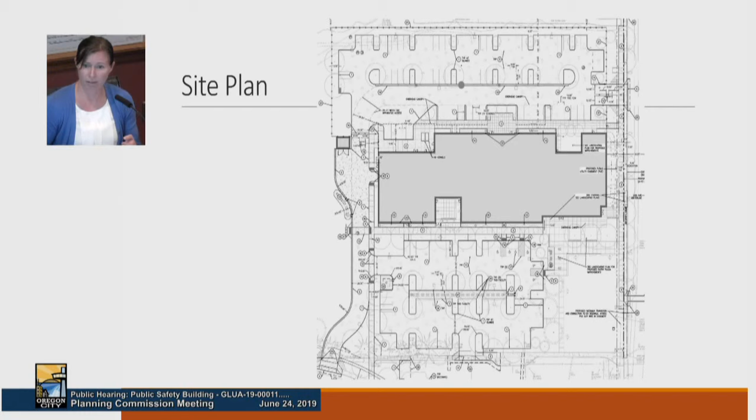So a slightly larger zoomed out view of the site, you can see the surroundings and the existing kind of open space field area that will remain.

Along with that, the applicant is proposing this east-west pathway connection, starting on the Linn Avenue sidewalk, which the proposal is to widen to 8 feet, add a planter strip with street trees, and then this walkway that goes east-west will come along the south edge of the building and then end at the field. There is an unimproved right-of-way here, Marshall Street, that path will eventually connect to.

So we have a condition of approval in the staff report that any future development on this property would require that extension, but for now it will just end at the field. There's also a north-south pathway from Warner Parrott that connects up to that pathway, and of course there are lots of other pedestrian walkways around the site.

This dash line right here, I want to point out, is the expected boundary of the future roundabout at the Linn, Warner Parrott, Warner Milne, Leland Road intersection. So with that roundabout, we expect that this parking lot, the existing parking lot on the south side of the community development building, will be lost.

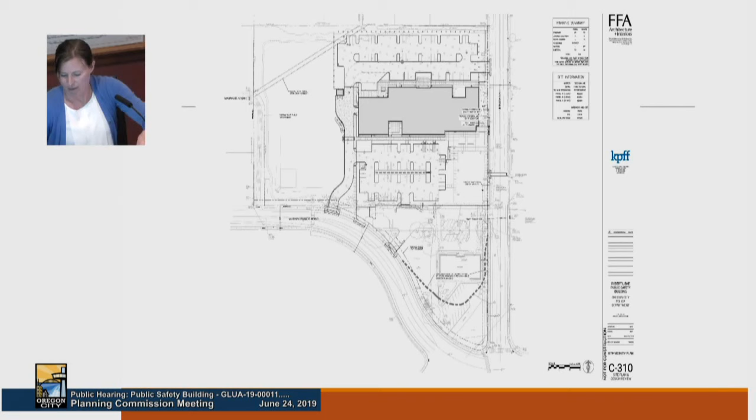Most of the site plan design review criteria would be a type 2 review, a staff level review, so I won't go into a lot of detail. But the variances are, of course, planning commission level decisions.

So the first one is related to building frontage on Linn Avenue. The code requirement is that sites with 100 feet or more of frontage, at least 60% of the site frontage width shall be occupied by buildings placed within 5 feet of the property line. The applicant has gained a greater setback than 5 feet through pedestrian elements in front of the building, so their setback will be about 18 feet, but that 60% of building frontage is not met.

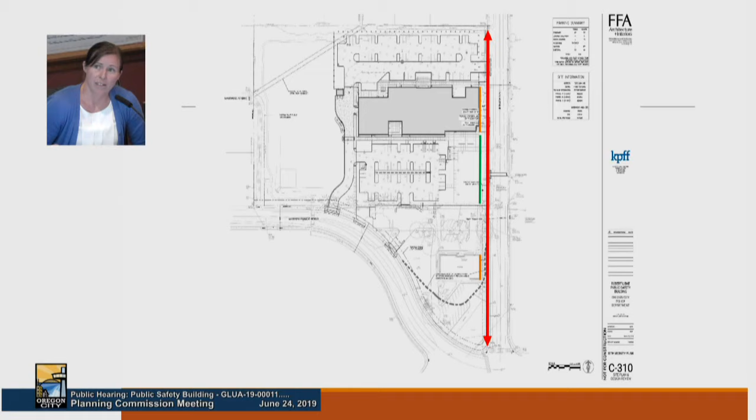The applicant's explanation is that the east-west orientation of the building allows for more daylighting and less energy use, that there are security reasons for that, and that it provides a separation between the public and private areas of the site. This is the Linn Avenue frontage, and the building frontage here is the proposed new building, about 100 feet of frontage, plus the existing community development building. Adding those two together does not reach that 60% requirement.

We do take into account the plaza area, which adds significant frontage of public open space. That doesn't meet the letter of the code, but we're considering it within the overall scheme. Also, the existing parking lot area between the community development building and the new proposed development leaves room for potential future buildings, city facilities. While there's no plan for that, we know it's a future possibility, and if that were to occur, this site would come closer to meeting that standard by adding more building frontage along the street.

The criteria for variances, to summarize, is that it won't impact neighboring properties, that it's the minimum variance required, that granting the variance would equal or exceed the purpose of the standard, that any impacts are mitigated, that there are no practical alternatives to the variance, and that it meets our comprehensive plan.

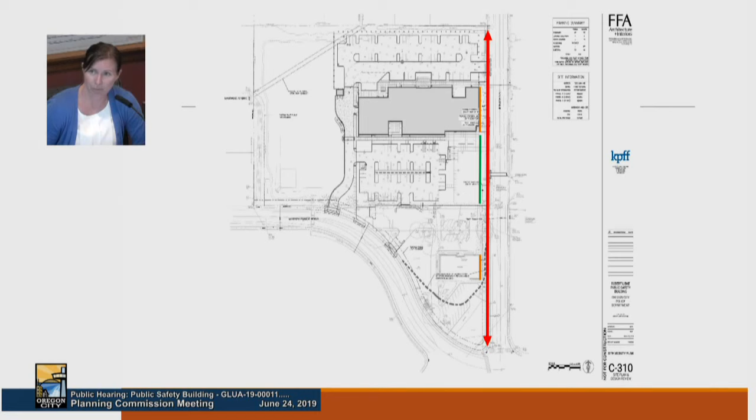So the second variance— Quick question, did you infer earlier, before you started, that all these variances wouldn't be an issue once the code gets changed in maybe the next month?

No, that's the code interpretation. Some of this code is proposed to change in the code amendments, but I don't think it would change in a way that would make their proposal not require a variance.

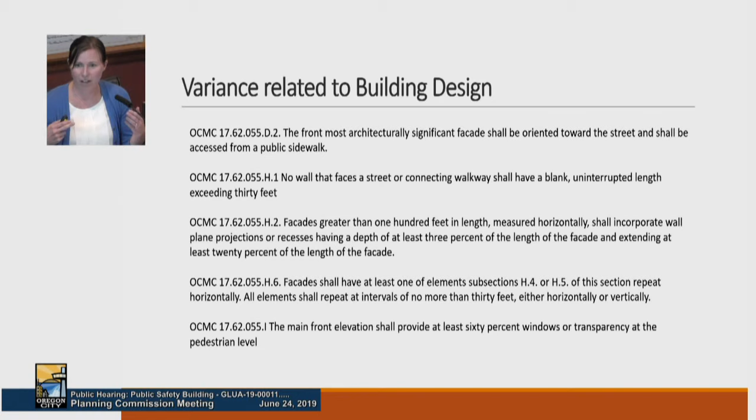So the variance related to building design: there are 5 design standards that the applicant is requesting a variance to. The first is that the most architecturally significant facade be oriented toward the street, but in this case it's actually facing south, not facing Linn Avenue. The rest are related to building articulation, wall articulation, detail of building materials, changes in colors and textures, and avoiding the use of long blank walls.

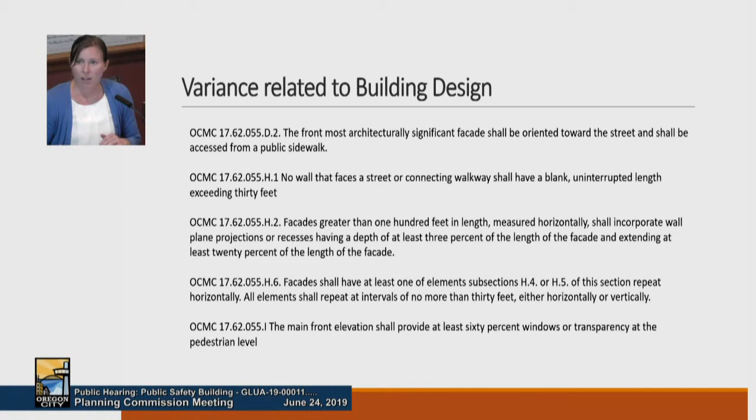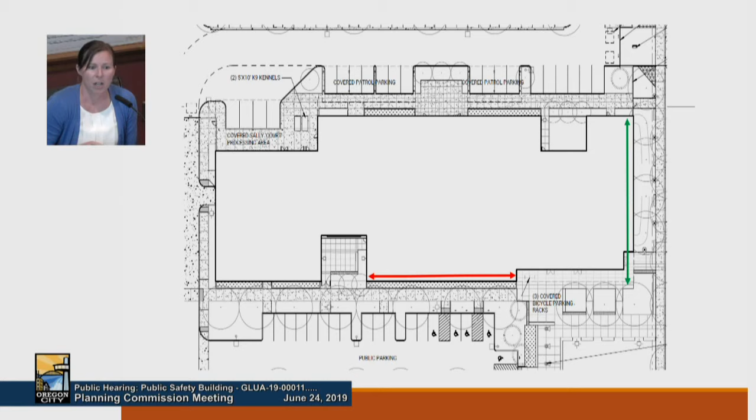The applicant's rationale for these variances is that a lot of them are based on design decisions. This is a modern building with a modern aesthetic. The entrance faces the plaza rather than the street to provide guidance to visitors and draw them into the entry.

There are security reasons for some of the transparency differences and blank walls. And then, of course, the building layout has bathrooms and other rooms that aren't appropriate for windows on that front facade. Adding windows to bathrooms is not something the applicant wanted to do in order to meet transparency requirements.

So we do have some recommended conditions of approval based on these variance requests. One is to increase as much as possible the transparency on the front facade.

So if we go back to that front facade, we think that this window can be either extended downward to the pedestrian level or moved down to the pedestrian level in order to count all this length as transparency.

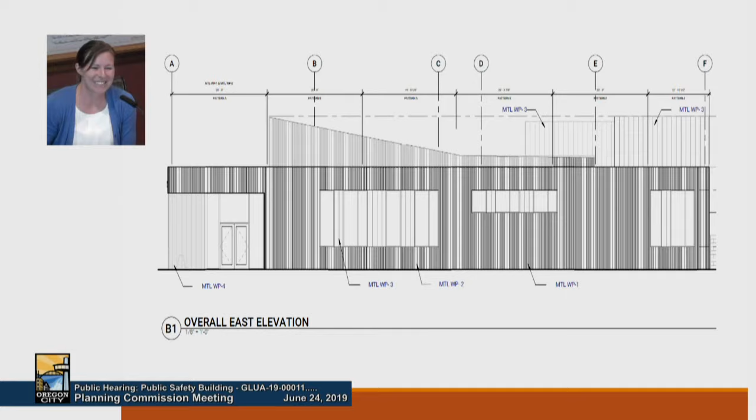Are they all bulletproof windows in that area? I'll let them answer that. But is there - can you see through them? Is it just a mirror? The windows on a building, we do regulate that the glass can't be fully reflective. But if people want to put blinds and drapes on the inside, like this, we don't regulate that. Okay, thank you.

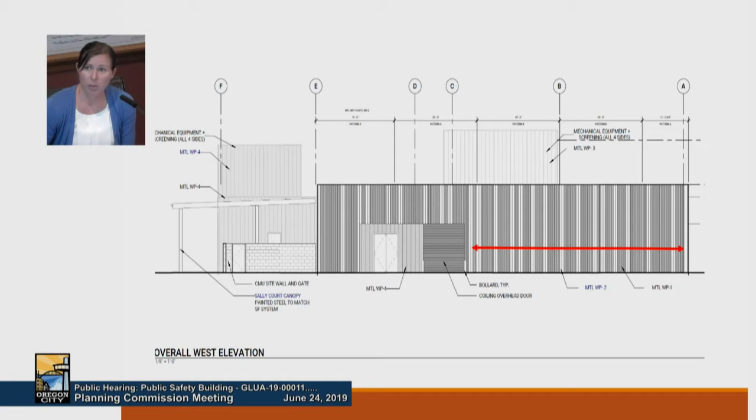Another recommended condition of approval is for some of these blank wall areas - that the applicant add some sort of architectural interest. In discussions with the applicant, we understand that can be in the form of changes to the actual building wall, or elements not attached to the building, such as a planting trellis or something that just adds interest without affecting their building design.

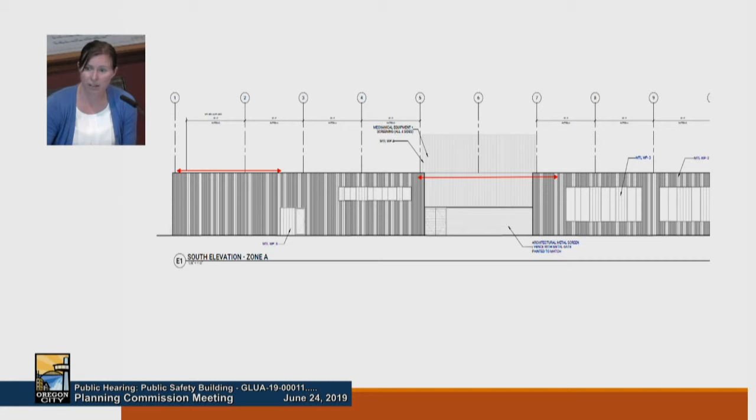Okay, so apologies for this long staff report presentation, but we recommend approval with the conditions in the staff report, and I'm available for any questions.

Any questions for staff? Is there a zone in the code that specifically allows for a police station, or is it completely absent from the code in general? I don't think it's absent, maybe in mixed use. Their code identifies police station with fire stations in all circumstances except for in the zoning designation. As far as it being an outright permitted use, I'm not quite certain, but I believe it's conditional, almost always paired with the fire station, which is where the fire station connection in this code interpretation came from.

Any other questions for staff? Okay, we'll move on then for a 15-minute presentation from the applicant.

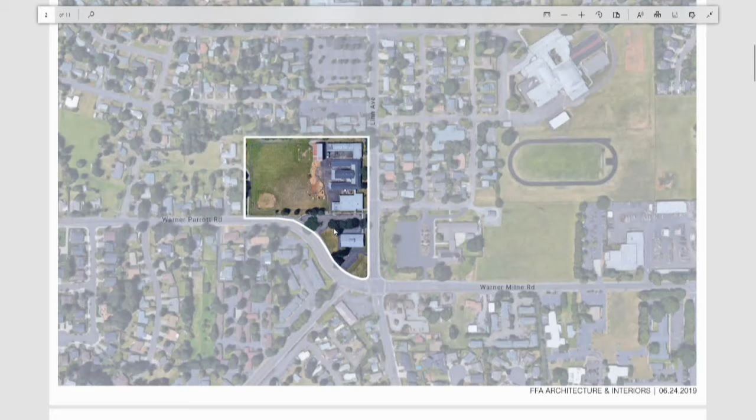And so with all our projects, and specifically this one, since there were so many stakeholders, we met early with all the community groups, police, the court staff, counselors, and neighborhood meetings, and really tried to get a sense of the goals and what this project wanted to be before we even put pen to paper. A couple of things that really stand out were this idea of the civic campus, celebrating history and enhanced public amenities, as well as the warm, welcoming public experience piece and how we start to bring that into the facility.

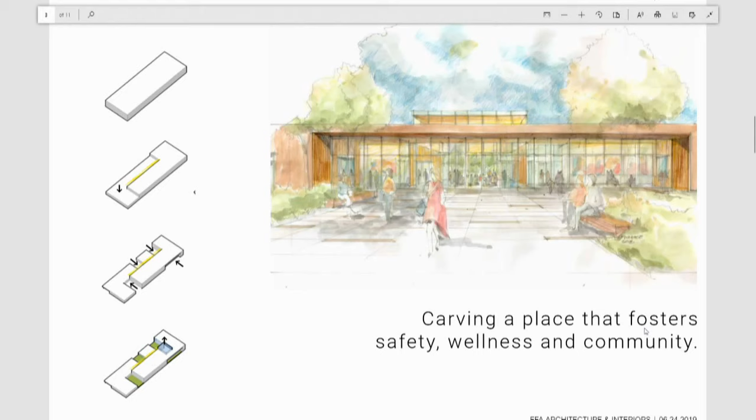Those are initial sketches here, and the idea of carving to foster a place for safety, wellness, and community really started to be that core that drove our design process.

With materials, we really started by looking at Oregon City's history, and that notion of being first founded on these basalt cliffs. As these cliffs are carved away, you start to see a lot of texture in the rock and how those patterns work. So we targeted the exterior of the building to represent that basalt texture and those patterns of striation, and looked for materials to be able to do that.

With that idea of carving in to create public spaces and connections, we wanted that to feel open and transparent. You see images here on the right of spaces we wanted to create, places people wanted to be, and those were the drivers of those spaces.

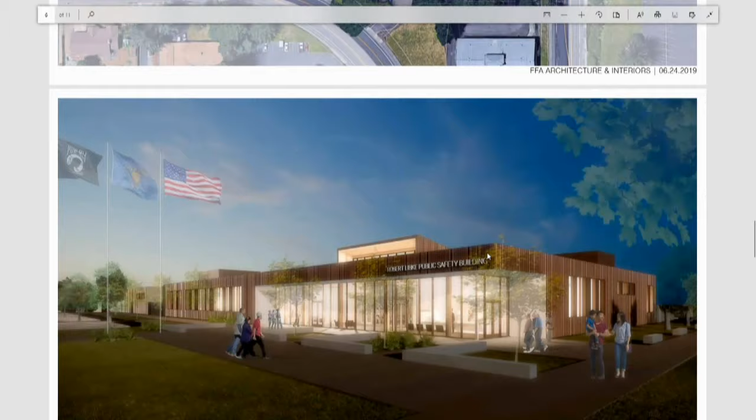This is the view from Lynn, walking or driving along Lynn Avenue. It shows the impact of that main public plaza, as well as the transparency of the building, with the idea of how we can draw people into the site and into this plaza environment. We also popped up the courtroom and multi-purpose room in the center to be a beacon you see as you drive by and see through.

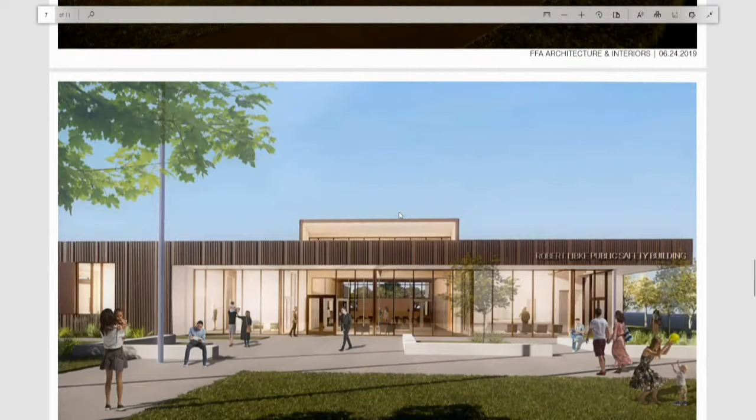As you get in, this is where you're standing in the plaza looking at the building, and you see the transparency Jim talked about - we're really seeing into those main community spaces. This whole area feels warm and welcoming, so we're using cross-laminated timber for the interior, giving these spaces a warm, nice, inviting environment.

You see the texture on the outside hitting back to our material concept of creating this texture and striations, with a more rugged rock-type texture on the exterior that softens as we bring people into the interior.

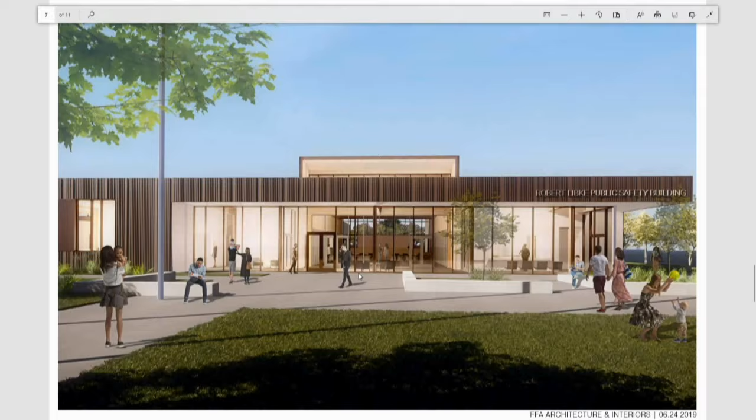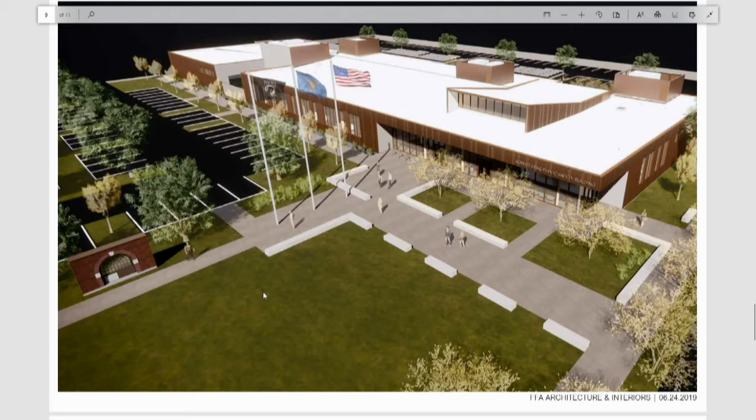Zooming out to see the plaza, that main entry plaza space - the history component became important, both a memorial to Robert Libke and the history of the old school there, finding ways to bring that history into the plaza. So we have a view showing a proposed historical marker, a commemorative marker to the old school structure, that would be part of that community space out front that everyone would see.

And taking that, we want to take the window, if you recognize that from above the doorway, and literally put that into here. It seemed people needed a relic, not an artistic interpretation, but a piece of that school there that I can always see. That's the most memorable aspect visually, I think, from Lynn Avenue of that school.

Yeah, and I think that hits on our site plan concept, because a lot of times in a police facility, you park the car and immediately walk to the lobby. We really, from a site perspective, wanted people to park the car and transition through this lobby or plaza area, connecting to the history of their community before they went into the facility.

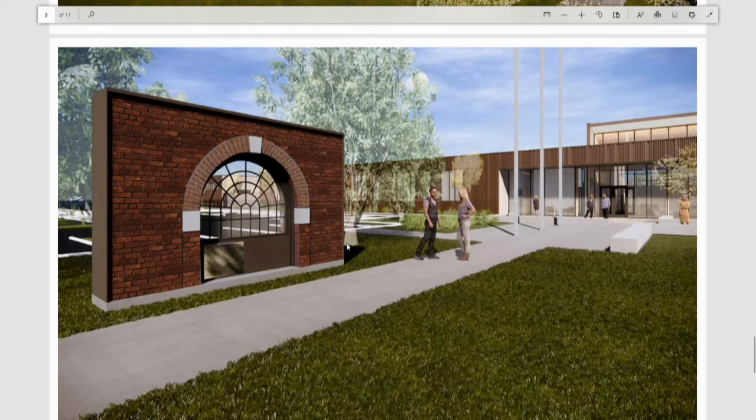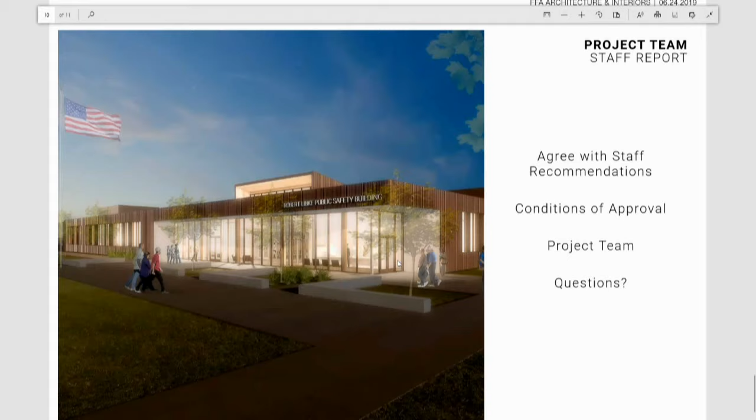So overall, I'd really like to thank Kelly and staff. It's been a really good process to be a part of. Big picture, we agree with all of staff's recommendations and the conditions of approval they're recommending. We brought our project team, our civil engineers and landscape team here if there's any questions. But with that, we can turn it over to questions in the public process.

Had a couple questions, if that's okay. The crosswalk on the northeast side looks like it's right in the middle of the driveway. Any safety concerns with that? Did it line up with the sidewalk on the other side, or why did it end up in the middle of the driveway there? That's a mid-block crossing, and one of the conditions of approval is to remove that. That was recommended by the traffic engineers. So the one to the south would remain, and that mid-block crossing would be removed.

Okay, good. All right, and then cross-laminated timber - when they first came up with that, were there some issues with that? Have those issues been solved? Yes, it's a pretty incredible product. There's a huge track record with the product, especially in Europe. We're bringing it over here, and we're using it on three essential facilities right now, and it meets all the requirements of a structural essential facility.

Okay, all right, I have a question. We're all privy to this and see all this, but a lot of people watching on television aren't. My first thought was in the public parking area - I was trying to look to see where there might be lights, because people coming to meetings in the evenings want to know if they're safe to get out to the cars. You should be by a police station, but I looked at the front of the building on that last picture, and I didn't see anything except lighting from inside. Are there lights planned for out in the parking lot? People watching television don't see that, so. Yeah, it's a very well-lit parking lot. We're meeting all of the city photometric requirements for the parking lot.

In the report that we got, there's a possible added right turn in, right turn out off of Lynn Avenue into the parking lot. It's not shown here, right? Correct. Where would that be if it comes to pass? That came about - we almost looped that completely into this project, but in conversations with Ms. Turway, we were talking about how the public can best access the police department as well as the community development building. That's something we plan on looking at in the future, easing how many people have to go through that intersection, if people can loop right in there as opposed to going through the intersection to come around. That's why that was in there - we wanted to dig into that, thought it seemed like a good idea. So that's just something for the future, as opposed to bringing it into this project, because we had so many moving pieces to get here.

Okay, and can you go back to the view of the front of the building? Yes, this one here, the plaza view. So the door there on Lynn Avenue and the main door down at the other end there, do those lead into the same common area?

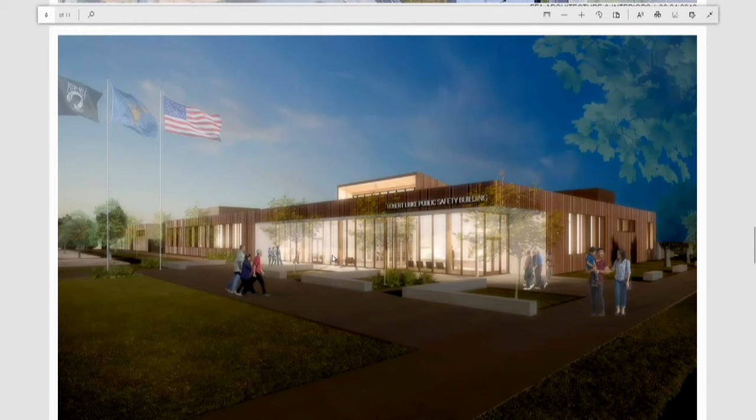Do you have a security issue now since you need staff, two people for traffic going in and out, or is that leading into one common area? There's a lot of different uses in this lobby. It serves as a court lobby when court is in session, a police lobby when the police lobby is open, and a pre-function space for evening council meetings and commission hearings. So there's three layers to this lobby.

They're controlled differently. There's a wall and a door right here, and the same thing here. We'll be able to control how far people go into what space.

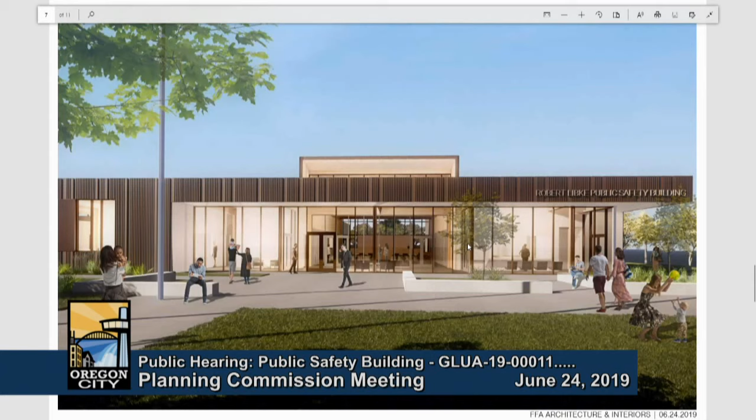Can you go back up to the layout? Where the secure entrance is off of Linn, does a car have to stop on Linn to wait for the gate to open, or is there space for a vehicle to pull in off the street while the gate opens? Yeah, there's plenty of space for a vehicle to pull in and get all the way past the sidewalk before they have to stop.

How many employees will be coming and going on an average 24-hour day? We have about 60 police employees with code enforcement, and 5 or 6 court staff. But on a given day it won't be those 60 — there's 4 to 6 officers per shift, with 3 shifts in the daytime. It'll be busier in the daytime than at night, so I'd say up to half of those people will be coming to and from.

Sure, but in terms of employees — oh I see, traffic officers coming in for court. Yeah, an employee might come in on their day off, come in, change, go to court, and be there for an hour and leave. The traffic study was done on a court day, looking at the busiest time.

That secure parking area on the north, is that for employees, for officers? Yes, sir, and staff cars.

So public parking can only gain access to the site off of Warner Parrott? Yes, that's the only access. So they have to go down to the intersection and negotiate a right turn, and then when the roundabout gets improved, they'll have to negotiate the roundabout.

Why wasn't it made available for access off Linn Avenue, so you could have that plaza protected? The right turn we were talking about is what we're potentially addressing on that same issue — we just wanted more time to look at it. They would go into that parking lot right there. We just needed some more time to look at that.

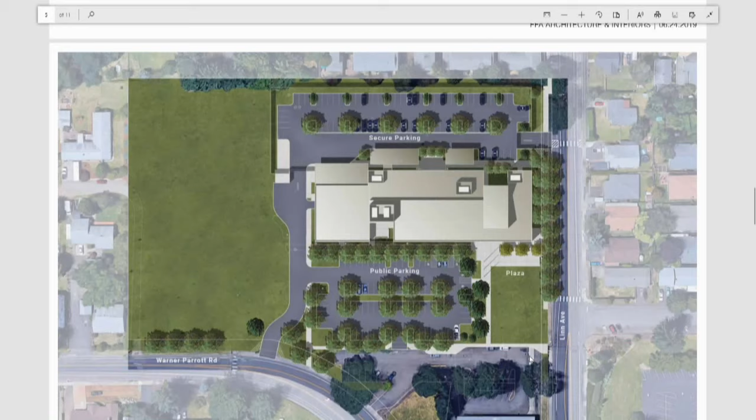Access to the Community Development Office really isn't, in my judgment, all that convenient for the public. I really have to negotiate that — I need to know where I'm going.

And that lowered driveway, right where your cursor is, is widened as part of this project, right? Yeah. And do the two parking lots connect, the planning parking lot and the public parking? Yes, right there — that's a vehicle connection. Oh, okay, that makes it easier.

What's that little offset right there for? Was that to get the driveway closer to the corner? Why does it jog to the left? It's doing two things — we're preserving some existing trees in this area, as well as creating the right distance separation between these two access points going onto Warner Parrott.

Is there going to be a center turn lane for people going east to be able to stop and turn, or will people have to stop behind them because they can't get out of the traffic lane? Good point.

It looks like it comes with a narrow point there, so people going east, there's not enough room to really pull into a median. I was wondering if someone's coming the other way and there's a stream of cars, will they be blocking traffic eastbound? I think on the second one there's some space, room, but the first one, no. It's just not wide enough.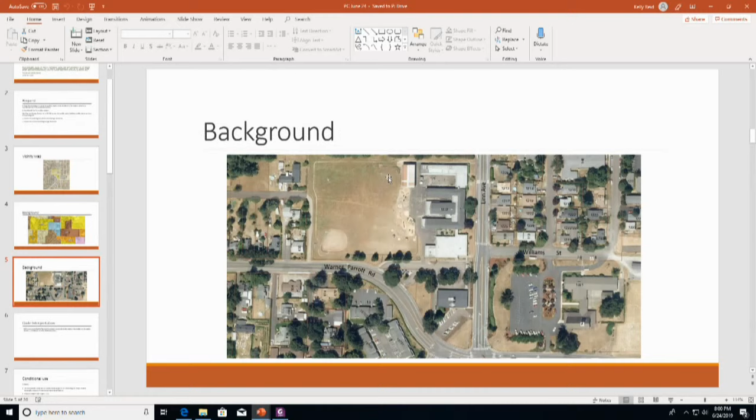Is there a gate there right now in the fence? No, right now on the very west side it's gravel. And right there it's all gravel, and then when you get to the west side of my property where the other lot is, that's all grass, it's overgrown, that's not a street. And then there's three logs there that block motorized vehicles from going through. So no vehicles use this. This is Marshall Street, though, an unimproved right-of-way.

And this is the gravel driveway from Warner Parrott that provides access to your property. In order to meet some of the standards in our code related to block lengths and street connectivity, this gravel driveway in the future would become a public right-of-way, a local street connection. And then so would Marshall Street, if any of the land along Marshall Street is developed with residential, since it's a residential zone. So street improvements on Marshall would be required if that were to happen.

So just to give some context for whoever built there: would have to improve it. Okay, so my question is, that's my only driveway. A lot of people up front have access from Warner Parrott, but a lot of times they'll come back there and access from the back. It kind of feels like they're coming into your yard and your driveway, and I'm just not sure, I haven't gotten a clear answer. I've been told that Elmer, who used to live there, owned it, and he didn't. So who needs to maintain it? That's my biggest question.

We can answer the maintenance question sometime after the meeting. But there is a 30-foot wide public access easement for your benefit. It was granted for the needs of your property. So is it just for my property then? I believe it's for both of these properties. So it's for both of those two sets. Okay, that answers it. We can send you the easement language as well.

Okay, and then the other last question is the lighting in the parking lots. Is there going to be much light pollution? Because it's kind of private over there now, and we just don't want lights blaring. Maybe that's something the applicant can touch on when they come back up, since they'll be addressing that. There will be no floodlights, there's a limitation on how much light can spill off of this property, and they can address it a little more technically.

So Kelly, just so I make sure we're clear here, as part of this application, there is no proposed change to the driveway or Marshall Street? That's correct. Okay.

And then if there are any trees, you can address whether you're going to plant any trees along the west side of the property, or any kind of landscaping. Okay, or fill out the card. All right, thank you very much.

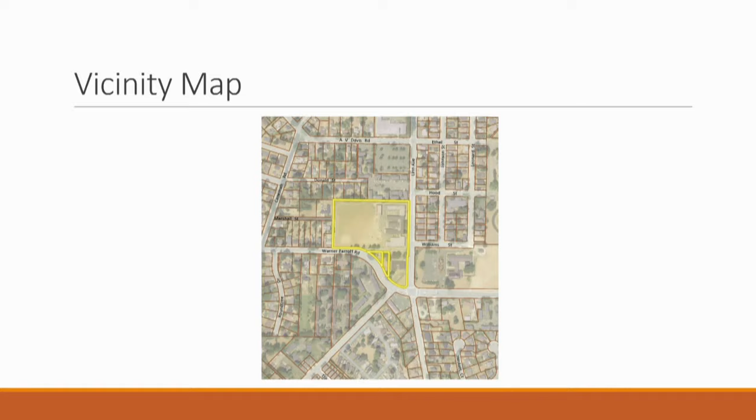Your street does, and so the stormwater solution - the applicant might be able to describe this as well, I think civil engineers are here - but the site will be connected to the city system via the pipe that serves your property. In order to keep the flow from being too much for that smaller pipe, what's proposed is to build an underground storage detention tank to detain the stormwater from the site along with the stormwater from your area, and then put it into the pipe so that it's slowly released at the same flow rate as today. So they're going to be detaining stormwater from the property and from the neighborhood, partially, if that makes sense.

Does it mean a pipe is going to go into her property? So there's a current easement - there's no, as far as I know, no off-site changes to the stormwater system, it's all on-site. Your drainage should all be the same conditions as today.

Our drainage comes down Donald Street. There's a path between the apartments and our lot, and then it goes right straight across the schoolyard. Yes, there's an easement right here - so the drain is going to go into that pipe that's going across the schoolyard?

I believe that is the pipe that would be connected to, but there will be a new underground storage detention tank instead of a larger pipe going through there. The underground storage tank is being oversized in order to allow the pipe size to stay the same, and then it'll be drained the same way it is today.

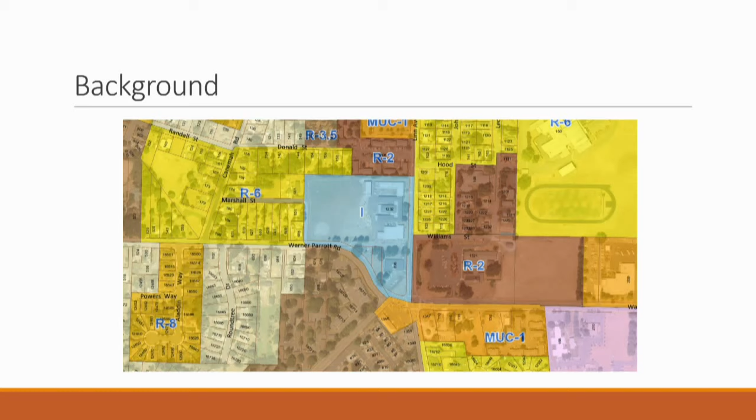The same way it is, which goes over to Marshall, right? Okay, as long as it doesn't back up into Donald Street. We've had that problem before and the city had to take care of that years ago, so that's our concern. I would imagine that a school with lots of kids probably would have less drainage than a police department.

No, this is stormwater, not sewer. Stormwater, right, oh excuse me then. Quick question on that - was it on Marshall Street or was that on Donald Street, the pipe?

Let me see if I can find - you see that line, that is a sewer easement. So the pipe comes down here, down this pathway that you mentioned, and then across the site, and over to Marshall. And that's where the stormwater pipe's going? It is already there, this site's just going to tap into it because it currently is going through - it's not going through someone's yard. Right, that's what I was wondering. So you're going to tap into that, and then it'll go on from that, not down the other way. That's my understanding.

Where's the storage tank at? It would be underneath the secure parking lot. Okay, underneath the secure parking lot? Yeah, not out in the field? The tank is here, and then it's connected to the pipe, and it controls the flow rate of the water into the pipe.

How many days does it have to rain before it fills that tank? It's been designed to our standards for whatever storm - 100-year floods. I can't speak to our standards, I'm not the civil engineer, but it's been designed to meet it. All right, and if it overflows, where would it go?

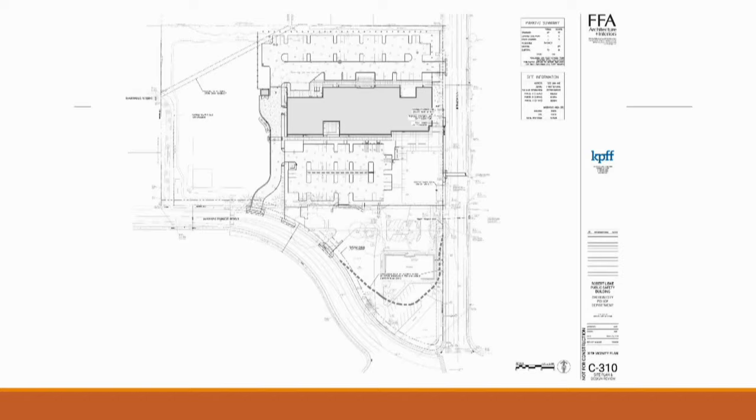One last question about the parking lot - how much of that is permeable pavers, or any kind of drainage through that concrete, or does it all run down like a river when it rains? It's all impervious pavement. It goes through treatment facilities and then to the detention facility.

And it's no longer 50 or 100 year storms, now it's 20 years, everything - you have these huge downpours. Yeah, it's getting worse.

Did you have any comment on the lighting question that was raised? Yeah, I was going to address that. We're meeting the trespass requirements of the city for the perimeter, and we've concentrated our public areas to make sure those are well lit, and the building helps screen that from the surrounding properties.

Are those what they call night lighting, dark sky lighting, where the light goes down instead of up? Is that what will be in the parking lot near her? Yes, that's what I believe. Is that also why the light poles are getting shorter? I noticed behind CCC they've gotten shorter - is that to prevent the light from bleeding out?

Our light standard is that you can be no more than half a foot candle across your property onto other people's properties. So on any adjacent neighbor's backyard, you won't see a really bright light - it's pretty dim, like the light from a half foot away from an actual candle in a dark room.